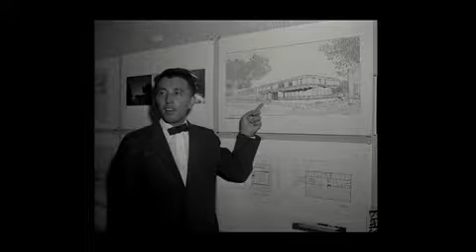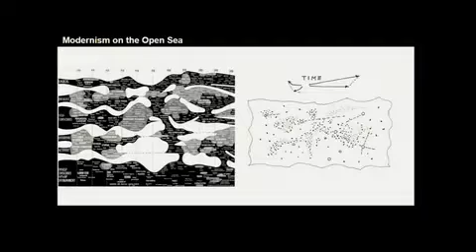I have written a short essay called Modernism on the Open Sea. My understanding was that until the end of 1970, we were all architects on the same boat called modernism, heading maybe to unknown places—with Corbusier, Mies van der Rohe, and Frank Lloyd Wright as guests of honor on the same boat. But then modernism became one big information center, and together with that, this boat disappeared, and we were thrown into an open sea with no manifesto or team meetings.

Still, each architect must find his own wave to ride. I'm not going into a lecture on modernism, but my contention is that fortunately the sea is not flat—it has waves. And my contention is that a kind of humanism with empathy might be the wave on which we can do our own swimming. I'd like to show some projects I've done recently, both in Japan and abroad.

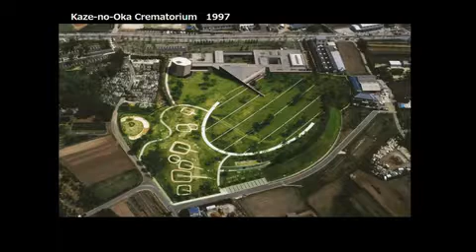So we tried to merge the building, as a piece of sculpture, into a large park. We also have an existing cemetery and remains of old ancient things, so it consists like a necropolis. We raised the ground to cut off the height of the crematorium elements, so people here may not be too aware of where they are in front of the crematorium.

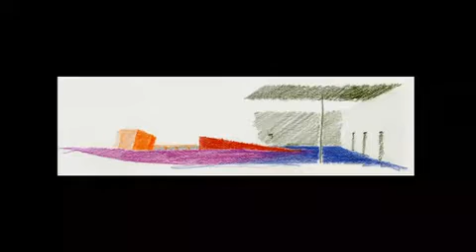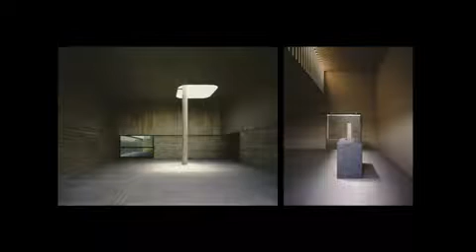Sketches. You come into an entrance, then through here you go into a next space where you have a first goodbye to the deceased. Then you come into the crematorium proper, where you give a final farewell, and after that you wait for an hour or so until the body is cremated.

I think this is the way we made our crematorium. After I finished this project, I visited the city, and many people said, 'Thank you, Mr. Maki. Now we can die in peace.' This is the highest compliment I've ever received as an architect—just like running a restaurant where people come for the Last Supper. It might have hit some unconscious wish that people or society have. I think this is a very important experience.

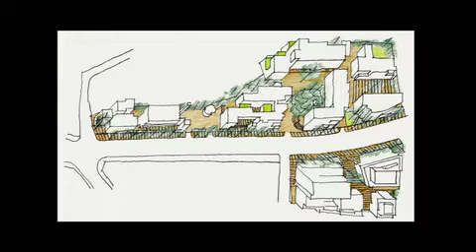Now I come to Hillside Terrace, which I did very slowly over 25 years in six phases. Fortunately, it has a wide street but also a very low density situation, with only 10 meters allowed in height and 150% FAR. So we were able to produce sequences of small open spaces, a corner plaza, sunken garden, and then in the second phase, a central plaza, etc.

You can see a number of small spaces with many greens left. I think it gives us a lesson: you'd like to have good public access but not too high a density—low density sometimes makes this possible. We were very lucky to have this; otherwise we wouldn't have been able to make sequences of spaces.

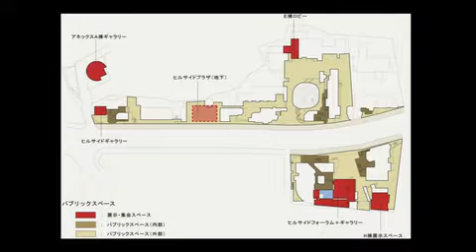You see the corner central plaza, and also an existing small shrine, with the building made by surrounding it. A number of trees are also quite effective in making a humane environment. You can see from this diagram that we tried to make many public spaces, shown in red—corner galleries, sunken auditorium, big galleries with a cafe and so on—to give an intimate feeling.

This is an interesting chart. UCLA people listed about 150 modernist architecture works of the 20th century and asked architects which buildings should be seen by young people and students—not asking which is the most beautiful or newest building, but which building, by looking at it, you might be able to learn something from. The best score was given to Mies van der Rohe's Barcelona Pavilion.

But then Hillside Terrace came together with several of Le Corbusier's buildings, and I felt very honored to be in this upper part of the list.

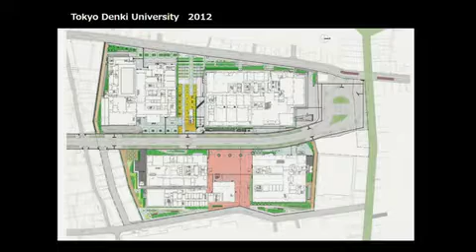Now I'd like to show some of the latest university projects we've done at the center of the city. The first phase, three buildings, was completed in 2012, and last year we completed one more. The most unique aspect of this campus is that it's in a highly dense situation in Tokyo.

It's well connected to public rail stations where about 1 million people pass every day, and the ward office requested that people should be able to move freely through the university—so there is no gate, no wall.

Certain places, only university people can go, will be through this card. And now you could see there is a public street dividing the campus into two. But with these bridges, anybody can go up or go into.

And just behind, they outsource some popular Italian restaurants. And in the front, we made a loggia. Loggia is a well-known city room in many cities in Italy, like Bologna. You have many of them. And similarly, we are able to have this loggia for people who are not students, but just live and chat.

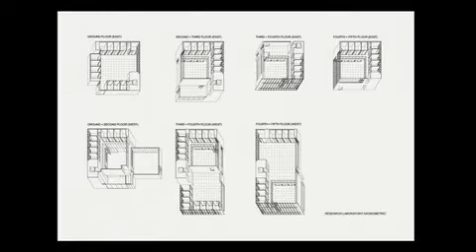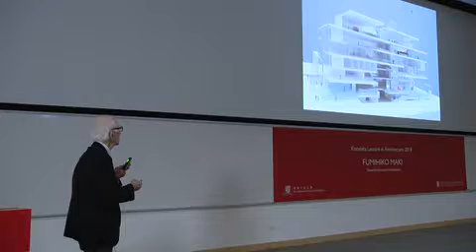We had been asked to make 7 laboratories with a big open sort of space and with a mezzanine for the senior persons. We had 7 of them, and they are staggered together this way. We also made the partitions all transparent, so people have a kind of view through horizontally, and we have a big open space, so vertically or even diagonally. By doing it this way, we were able to produce this kind of building.

This building a few years ago received a Harleston Parker Prize. It's one of the best, most beautiful buildings in the Cambridge, Boston area.

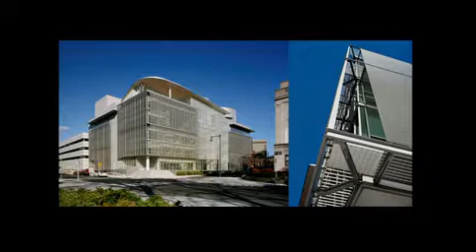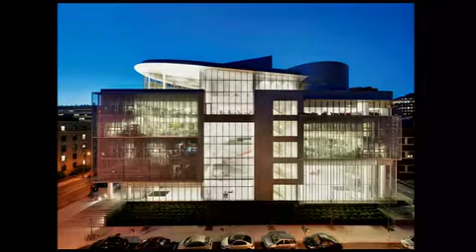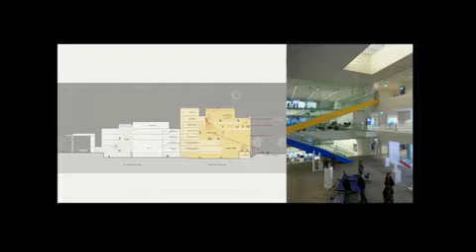It's a detail—in the Boston area, you are not allowed to have an open, clear glass facade anymore. But by providing an aluminum screen, we are able to do that, to cut off unnecessary heat in the daytime. In the evening, it becomes quite transparent. It's connected to the existing media lab designed by I.M. Pei, and we have this kind of openness.

You can see how these 7 studios are interconnected. It's a detail.

At the central plaza on the third floor, people can gather for lunch on Friday. Sometimes this place becomes a disco in the evening. It's a view of the studios.

Just below the top floor, we have a small cafe for people. And when you go up, there will be a small open space looking at the silhouette of Boston.

Then in 2007, we did Republic Polytechnic in Singapore, near the Malaysian Strait. The place used to be a British prison camp, still snakes there, but the Polytechnic was able to have half of them and have this kind of appearance.

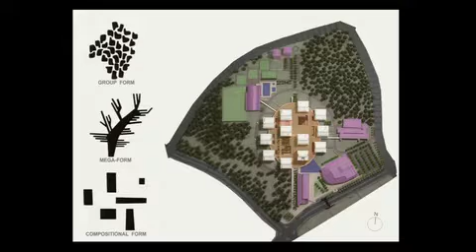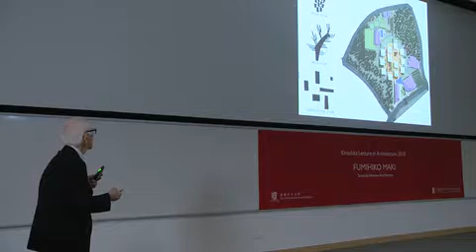You could say the organization is based on a collective form we created, we suggested in 1964. Professor Chen just mentioned this collective form. There are a number of similar studios, like a group form, but with a huge plateau underneath to create a kind of megaform.

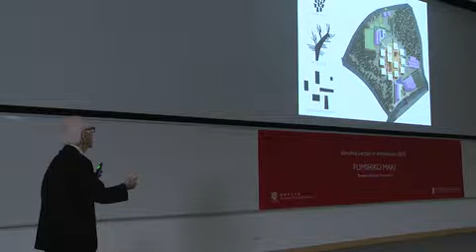Then compositional placement of administration, cultures, and garage, etc. This is a gymnasium and the housing for people.

You could say the system of learning is different from the ordinary classroom versus teaching student setup. Instead, they are solving a certain learning problem. This system originated in England and was brought in here, where students are given a problem by tutors in the morning, and later in the afternoon they must come back individually or in a group to report their findings.

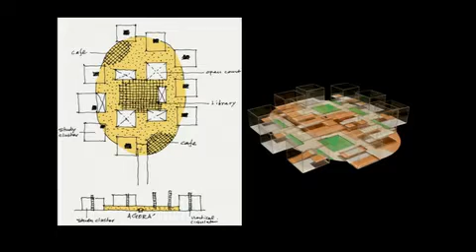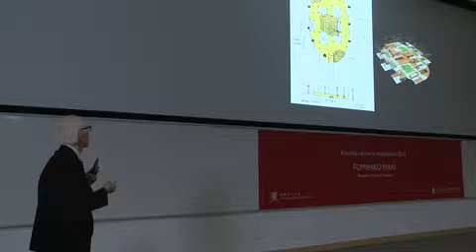So this yellow space we call agora becomes very important for students gathering. And there are many places like a cafe or the library and so on.

But we use the same principle of an open, transparent system. It's like a boulevard with small openings to avoid direct sun coming into the place because it's a tropical place. And there's a wireless library where people are able to discuss problems and so on.

Also, as you know, Singapore is made of 70% Chinese, 20% Malaysian, 10% Indian. So Malaysian students sometimes give us singing.

Chinese students give this kind of festive object. And we made also a snake-type bench where students can just gather and chat.

But one of the most important things is that at the center, they created a small cafe and also a billiard table. This seems to be the only campus where the central part has a billiard table. But altogether, people are also able to sit by themselves, to avoid the group thing.

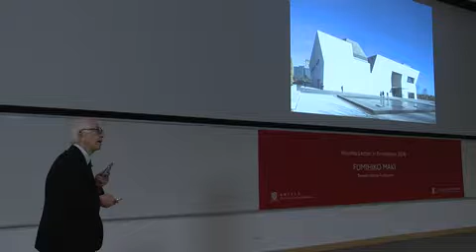Then I go into the Aga Khan Museum, which was made in 2014. Charles Correa did the Ismaili Center. We've been asked to make a very light-sensitive building. I received His Highness Aga Khan's 5 pages of letters when I started this project.

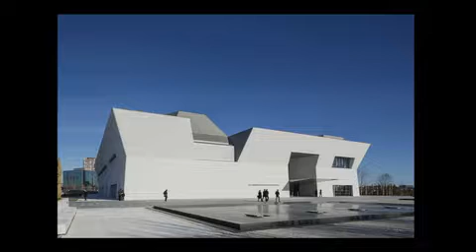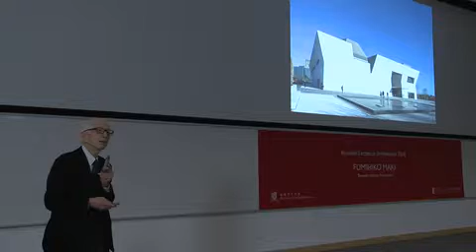He told me Islamic architecture is very sensitive to natural light. So we decided to find out the whitest granite in the world. It took a year and a half, and finally we found it in Brazil. It's called Margarita. So when I have a pizza, I always remember this stone.

And you could see, I tried to make a 2-story high building, slightly slanted, to give a different reflection of light. It's a natural way to express a 2-story building.

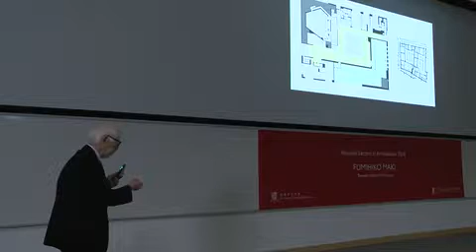One important thing in the museum is that we do not have too many openings on the exterior. So the central plaza becomes very important.

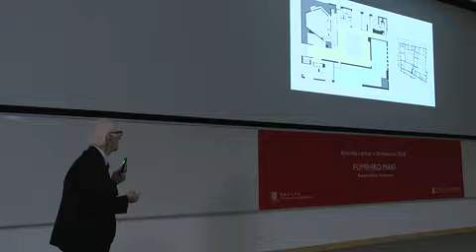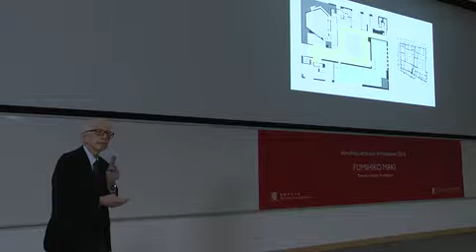When you look at old Greek cities, houses are nestled together. So they all have a central plaza to which their activities are oriented. Sometimes the funeral takes place in these places as well.

So we had a similar idea with a central court and foyer for the hall, and an entrance for the museum proper, restaurant, information center, children's school, etc. People are able to come here freely and only pay at the gate at entrances to galleries and the foyer when some events are taking place.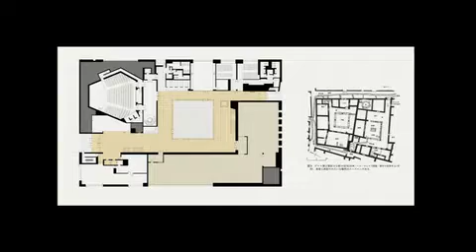His Highness always advocates pluralism. He said he can make the building very modern when you look at it from outside, but please make it have an Islamic ambiance when you go inside. So we use some Islamic patterns on floors and so on.

People are able to come and it becomes kind of a small community center. When nothing is going on in the court, people can come out and chat. It's a very friendly space. Sometimes weddings also take place here as well.

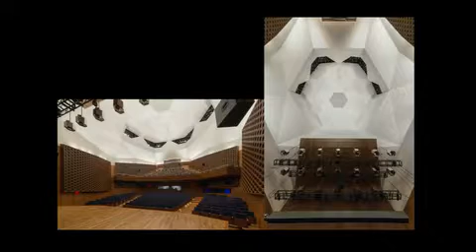Galleries - it's all Islamic art. Chinese love 8 as a lucky number, and Islam loves 7 as a lucky number. So we tried to use the number 7 in the show.

This is the Singapore MediaCorp we completed 3 years ago. This was the site, and the master plan was done by Zaha Hadid. That's the reason why there are no straight, Cartesian streets. Our site was also surrounded by her streets. Had we had a very low density project, we could have a square building, but not.

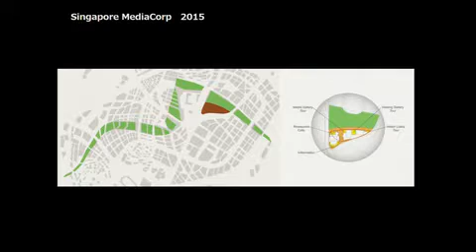It's a very demanding spatial situation. So we said, why don't we use Zaha's curve for our building as well? It has a fairly large auditorium, main studio, and sub-studio, with offices on top. It's a fairly complex building.

We use stainless steel to clad this building to give a better reflection. Those curves are all Zaha's curve. The stainless steel facade was made by YKK, one of the biggest zipper companies, and they are now very active in making facades. Construction was done by Kajima, so it's the first time I had an all-Japan team for this project.

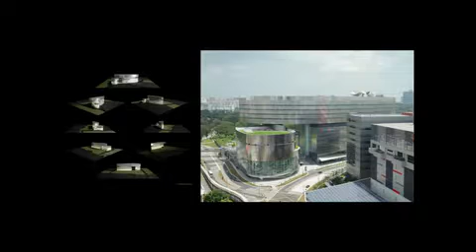So it is Zaha's sort of curve. And here, the center has an open plaza on top from which you could look down the park, from the park side. And the offices are open offices. People are able to come to a particular space they like to use every day, and also tourists are able to go through to look down here.

I think this is a kind of media complex where not only television and radio, but also some kind of publishing is done in this building. Very dynamic, open spaces with different kinds of ambience.

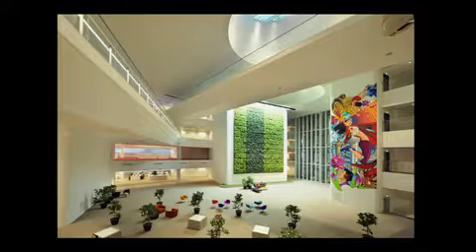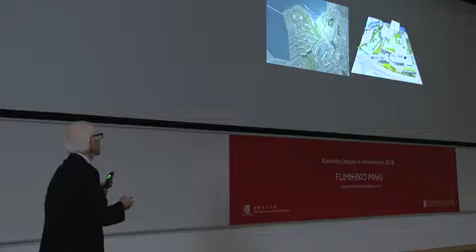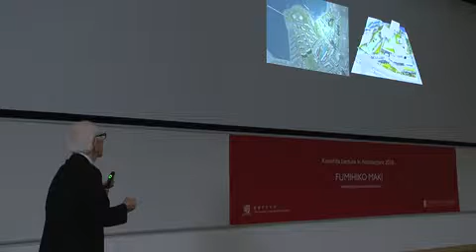Now I come to Shenzhen, SeaWorld Culture and Arts Center. I'm sure some of you might have seen this building. When we were brought to the site, I was told this is one of the nicest sites you could find in Shenzhen for this kind of facility, because it directly faces the water and looks at Hong Kong, and behind you have a mountain. It's also surrounded by existing Shenzhen development.

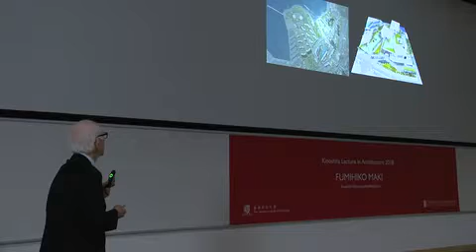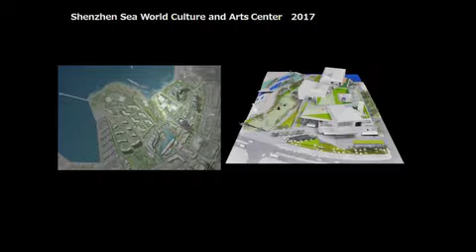So we decided to make this a kind of people's hill. Anybody can freely go up to the top and enjoy the view of all the other places, or go inside to find the places they like to visit.

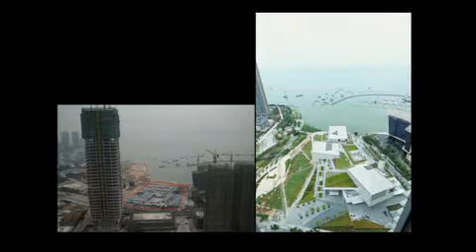We decided to have three strong protrusions to indicate one to the water and sea, and then to the park, mountain, and city behind. So the landscaping we did is well integrated with the roof garden as well, as you can see.

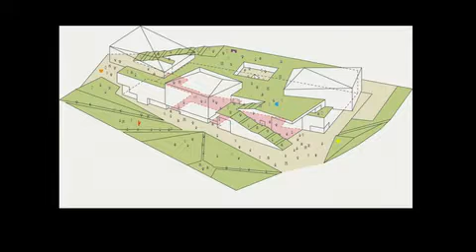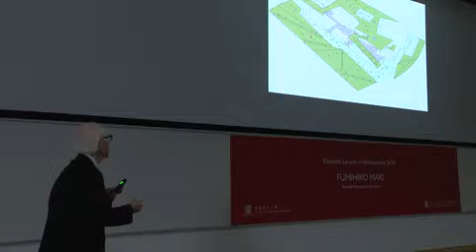And you are at the entrance, looking at the building through the entrance hall. There are two large outdoor stairways leading you to the top, and also inside some kind of open public space as well.

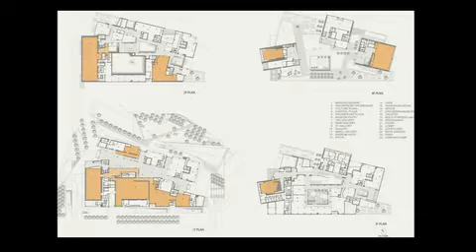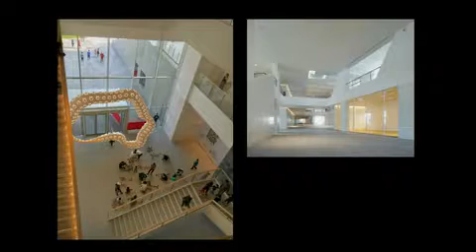Then you have indoor open spaces surrounded by a number of facilities. The entrance hall has special columns we made to make it a little bit iconic, symbolic, and so on. It's a central gallery run by Design Society for the Victoria and Albert Museum, with galleries in different wings, and our exhibition, which is going on until the end of June.

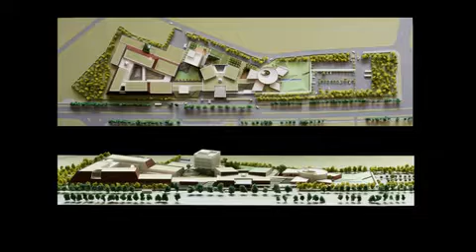When we designed the new museum of Bihar state on a site called Patna—Patna is the capital of Bihar state—we were given a 500-meter long site, so we decided to make the whole building like a campus. The program also asked for a children's museum somewhere, and then we produced a central building where all people come in and go into the gallery proper.

We decided to use Corten weathering steel, because the iron was originally developed in India, combined with sandstone. Unfortunately, in India the maintenance of public buildings is quite often not so good, so I think the combination of Corten weathering steel and sandstone could be easier to maintain the building.

So they are not like exposed concrete. Instead, we decided to use those two materials to cover the exteriors of this project. So you could see the Corten wall, and stone as a base.

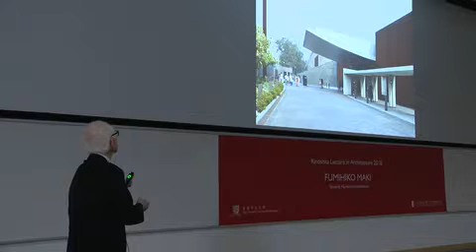There are several courts, and you are able to come into this central entrance. The pure steel iron towers would not rust. Entrance court, looking at another court behind.

Court surrounded by main galleries and with some bridges. And the light is always very strong. So this kind of opening gives an interesting layer of lightness.

On the children's museum, by request of the client, we used terracotta instead, but it's also a good material to be used in India. The children's museum was opened two years ago, and you could see the opening scene. The amazing thing is that sometimes 3,000 students come to the museum in one day. That could only happen with 300 in Japan. So again, I mentioned to you the massiveness of people that always happens, even at this museum.

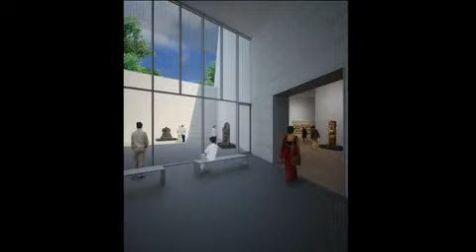I was chatting with somebody. You see, Patna is near Nepal, and there are quite many interesting places related to Buddhism. So there are many Buddhist sculpture remnants still being found there.

Now I'll go into one of my last projects in New York, the WTC redevelopment. This picture was in the New York Times when we architects all got together to show what we had done, in 2006. You see Richard Rogers and Norman Foster, Daniel Libeskind, who did the master plan, Governor Pataki, our client Silverstein, and myself.

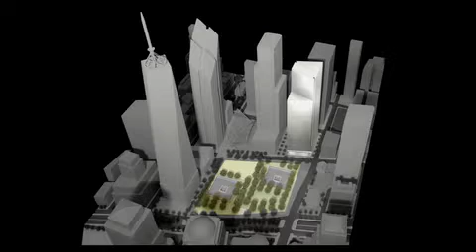Our building happens to be the fourth one. The first was done by Skidmore Owings & Merrill. Then Norman Foster, Richard Rogers, and ours.

Two small courts are where the old World Trade Center's two skyscrapers stood, but now it became sunken court, netted with big sort of trees, a very nice place for people to come. And we try to make glass sculptures which could give different reflections depending on the weather, orientation, and day.

This is a very interesting picture I took in 1973, right after the World Trade Center was completed. I was taking an Amtrak from Philadelphia to New York, and you see there's no financial center yet, so the beautiful shadows cast on the Hudson River. I have never received so many pictures from people I don't know. Sometimes people said our building disappeared, and they sent two pictures, one showing our building with the number 1, and then nothing. So in a way, our building accidentally became a homage to the people who died here.

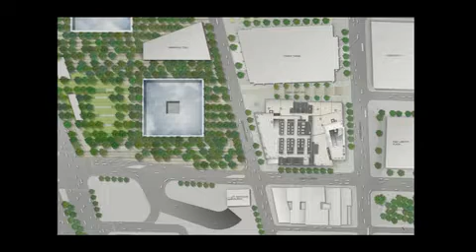Then, our building faces the memorial park, and people come here to just love the wonderful park ambiance. This is the entrance court, a view taken when we had the opening ceremony. From the 3rd floor, where we have an Italian restaurant, people are able to look down at the court this way.

Now we go to a field. Okay.

Hi, my name is Yusuke Kushima. I'm a Japanese architect, and I'll be hosting this program. Today I'm in New York. It's September 11th, a very special day. As we all know, 13 years ago, a terrible tragedy happened here.

I myself remember when I used to live in the States, there was a twin tower, a very symbolic building right behind us, and now it's gone. On September 11, 2001, terrorists launched multiple attacks against the United States, bringing down the iconic World Trade Center towers in New York and killing roughly 3,000 people.

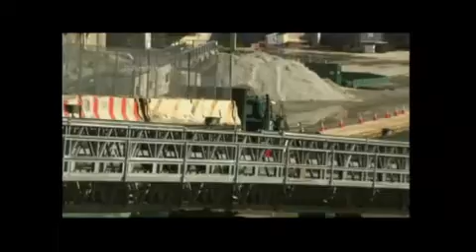Next to the memorial, there are newly built skyscrapers. One of them is designed by a Japanese architect, a very important figure who helped create modernism and contemporary architecture today, Fumihiko Maki. Fumihiko Maki is one of Japan's most renowned architects. He designed the new 4 World Trade Center building. Two years after 9/11, redevelopment plans for the World Trade Center were announced, with four skyscrapers to be designed by world-famous architects. In November 2013, Maki's building was the first of the four to be completed.

Two, three. All right.

In September 2014, Maki came to New York and paid a visit to the building he designed.

How do you know I'm Maki? I looked at the plans and I met you when the tower opened in November 2013. I don't know if you remember. Oh, I see, you have a good memory. Thank you. Beautiful tower, beautiful. Thank you.

Four World Trade Center rises 977 feet, about 300 meters. It has 72 above ground and 4 below ground floors.